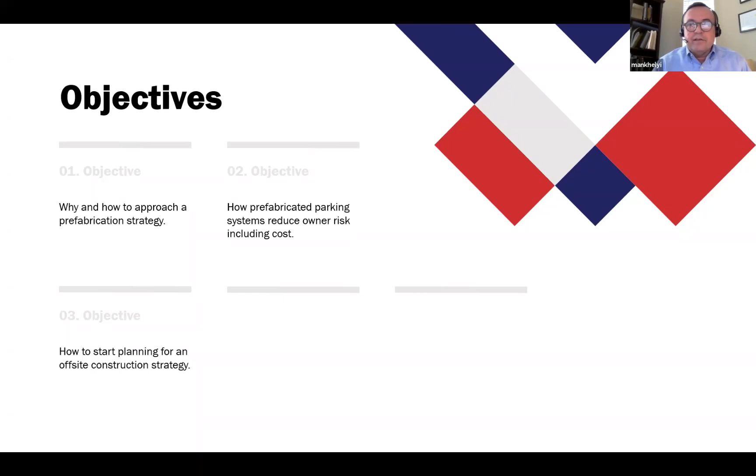Industry benchmarks show that roughly 61% of typical construction projects are behind schedule, while 49% are over budget. With these outcomes, owners are looking for a more efficient, productive, and cost-effective way to build parking structures.

One of the things that I looked at as people walked into the conference virtually - I think we've all experienced it - when the thought of an asset is realized to support an organization's business objectives, the most prevalent next action is to get those folks engaged. And usually there's different ways to get people engaged and who those people are.

We think there's a different way, especially when it comes to parking and office, but specifically to parking: the knowledge on jurisdictions, entitlements, desired parking attributes specific to parking, and operational efficiencies. There is a way to de-risk a lot of the influences on parking, and we want to talk to you all about that today.

And that image on the right you see is actually one of our projects. And no, it's not lunchtime. It's a typical scenario where you see very few folks on site, as most of the workforce is taken off site.

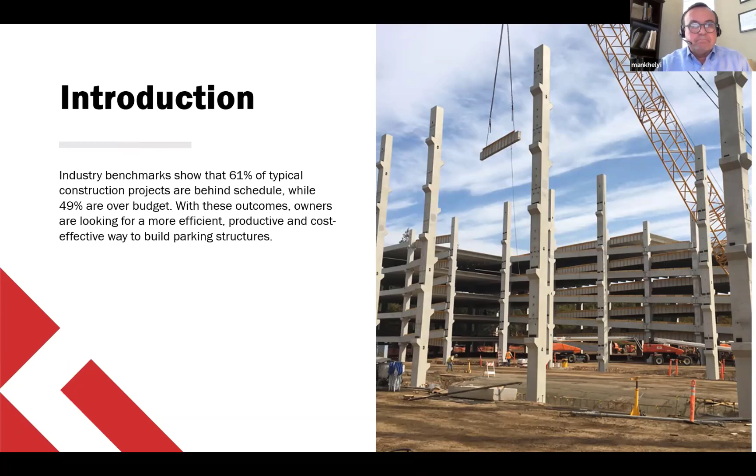So why is that? I think a lot of the industry continues to struggle with the same issues. The same issues dealing with the uncertainty, and the things that are really always driving uncertainty that really influence a bulk of your budget and schedule uncertainty relate to what I call uniques.

And those uniques include entitlements, design errors, unexpected site conditions, conventional design phase approaches, design phase services approaches, workmanship, engineering changes, design and construction. We find that a lot of our owners all of a sudden want to build buildings that are beyond kind of their core group, whether they're in healthcare or biopharmaceutical or they're developers of office campuses.

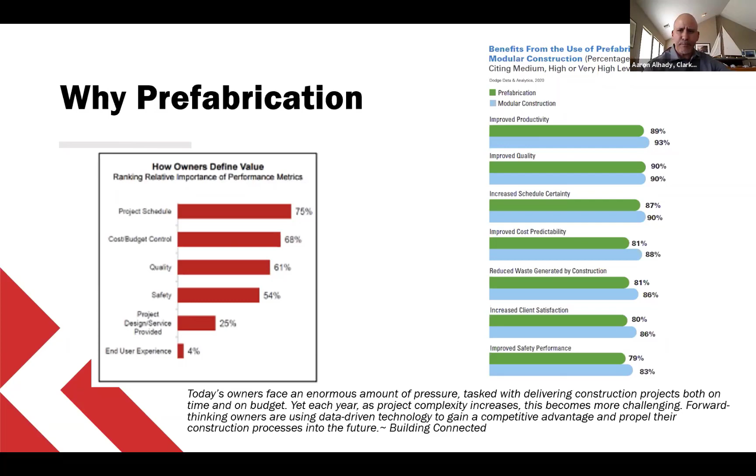Yeah. So traditional construction today is risky, and that's a very common theme. This slide talks about the traditional KPIs we all measure when we go after work. These are things that keep owners frosty in terms of when they bring on capital programs and construction projects onto their sites. Philosophically versus traditional, studying prefab and its effects on design and build means and methods is pretty profound, and across the board the results can be far-reaching in many industries, in those KPIs.

Chi Chi Rodriguez once said golf, and I'll use that interchangeably with prefab, is a thinking man's game. You can have all the shots in the bag, but unless you use them right, you're going to get into trouble. And I always think about my experience in lean best practices and being a lean practitioner.

It's a commitment to do things that are beyond your emotional connections to what you're producing. They're beyond what teams or specific personal goals might be. And when you think about lean best practices, you want to always think about the project first. So you start to think about what you can commit to in terms of realizing the true benchmarks for KPIs with respect to labor shortages, risk to revenue, or cost certainty, and then you commit to it and execute and realize it. We found that a lot of that has to happen in the beginning in delivering the best outcomes for your project.

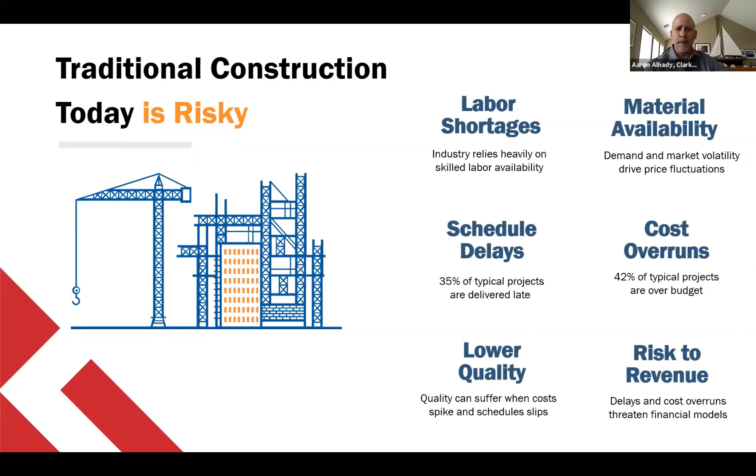It reminds me of a story. Mickey and I were at a job site visit for a prefabricator, a fractional housing development in the Midwest, and actually in the Southeast. The superintendent was showing us around this project, which was wholly basically prefabricated, and he was very pleased about the notion that prefabrication really worked, because when they were out there doing the work and things didn't work out, he was able to call their designers and product people and have them come out to the site and fix the problems right there.

They're only a phone call away, he made it sound like, and it was perfect. So we talked about what made this prefab a success. When you think about what prefab is, which Mickey's going to talk about, this particular project had a sawtooth design on the perimeter footprint. It had 8 different room types and multiple sets of interior wall layouts. So yes, arguably you could move all of those components into a plant and prefabricate them, but that's probably not what really embodies what prefab's all about.

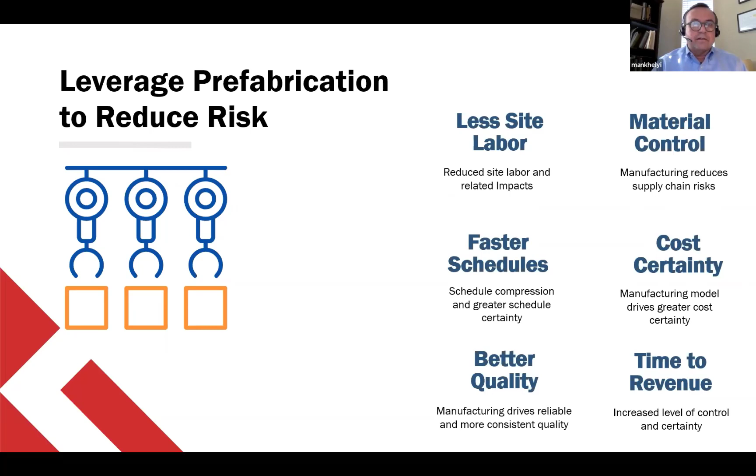Thanks, Aaron. Just one quick analogy that I like to use when we're onboarding at Clark Pacific, in terms of prefabrication, is to look at it kind of like an assembly line for an automaker, as an example. The chassis tends to be the same, and if we can reuse as many of the details and components as possible, the owner can leverage that cost certainty. The outside of those buildings could be very different, but the bones of it are essentially the same, and that really helps leverage the project in a variety of respects.

Quick touch on Coleman Highline, which is one of our examples here. It's a larger campus setting in San Jose, next to the San Jose International Airport. As you can see, the airport is in the background there. Hunter Storm Development is the developer, and the Fisher family is a partner as part of that. The overall campus is roughly 1.5 million square feet of office, with some residential on the tail end of it, and a hotel component.

What's unique is, on the bottom right of the screen, there's the MLS, Major League Soccer stadium, and how that plays into the parking. I'll touch on it in a bit, but a portion of this is built - if you're looking at office buildings, B1, B2, I think B3, B4, and then the same with the parking structures.

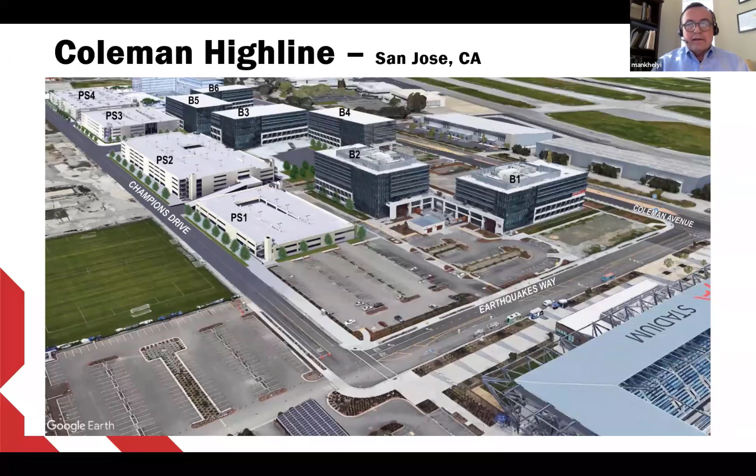Deke Hunter, the CEO of Hunter Properties, part of Hunter Storm - I'll quickly read his quote: Our most recent project that leveraged prefabrication is 5,000 stalls within the Coleman Highline mixed-use development, which sits near Avaya Stadium and the San Jose Airport in California. The site shares parking with the stadium, so we had to deliver the project quickly and with as little disruption as possible so that we could accommodate Major League Soccer games taking place between March and October.

So part of the decision making from their perspective was finding a way to thread the needle, because the parking structures - several of them indeed provide parking for both office and soccer games. And we not only had to deal with how do you segregate either attendees or office workers, but how do we thread the needle in terms of timing, schedule, fabrication, and minimize disruption to temp parking.

If you look at the bottom left below PS1 is the practice field. So there was a lot of moving parts. We had a contractor to the north of us, all those blue and yellow buildings, so that was going on simultaneously as well.

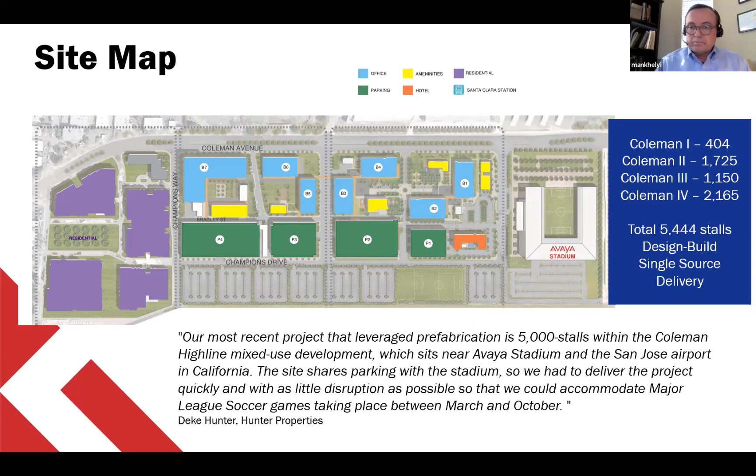One thing I want to mention is we're doing a lot of production planning in the plant. If you look at this, it almost looks like a production plan. You can see the asset types on the north side of the image, and on the bottom you have a different view. This is probably another good reason why Deke was very open to figuring out how we would utilize prefab. He probably just thinks that way.

And to his credit, he has done both, and both in Aaron and I's background we have done both, meaning we've done cast in place parking structures, we've done the traditional design bid build, design build delivery. So with 35 years experience, we've been around the block.

Deke's other quote: We needed the project completed quickly and with a light touch on site. Prefabrication met all our prerequisites, whereas cast in place would have taken longer, cost more, and required a greater footprint on the site and been very disruptive to Major League Soccer games.

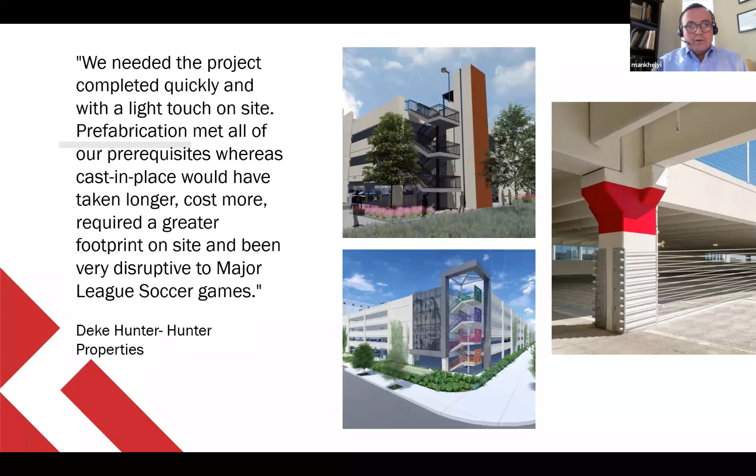A couple images on the right were some quick sketches done. One of the last parking structures actually straddles two cities, so two thirds sat in one city, San Jose, and the other city was Santa Clara. So we had to design it in a way that it appeased both, and we had to have some slightly different elements on either one, which made it a little bit interesting.

To touch a little bit on the architecture side of it, one of the differentiators from our perspective is our buildings come out to the site and they're finished. So the exterior is essentially whatever you want it to be.

And then to minimize the overall aesthetic appeal, you got to remember the office buildings were the jewel of the campus. The parking was supposed to take a subservient role. We simply sprinkled some minor architectural elements.

Like the Cor-Ten elements you see in the upper right image, here and there, because those were key elements that we picked up from the office building. So the goal was to make the parking structures kind of play second fiddle, so to speak, to the office buildings and to the tenants, but still have a very clean and simplistic architecture to them, and then pick up some of the design cues from the office buildings.

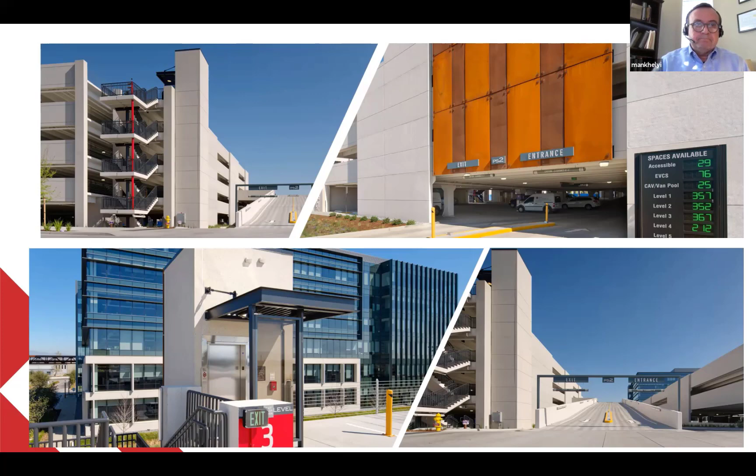Keeping an eye on the clock. Quick run through on the structures.

PS1 and PS2, those were the two on the far right on the previous site plan. Those have been completed, you can see the rough stall count. The bigger one, PS2, has both an internal park on ramp and an exterior speed ramp to allow the ability to separate office workers and soccer attendees on an as-needed basis, and to be able to either exit or enter the building a little bit quicker. So it was a performance criteria and programming.

And then PS4 is in construction and should be wrapping up here in August of this year, and PS3 is in permitting. But similar with that one, the larger one, PS4, has the ability to kind of segregate from a programming perspective to allow for both attendees and for the office workers.

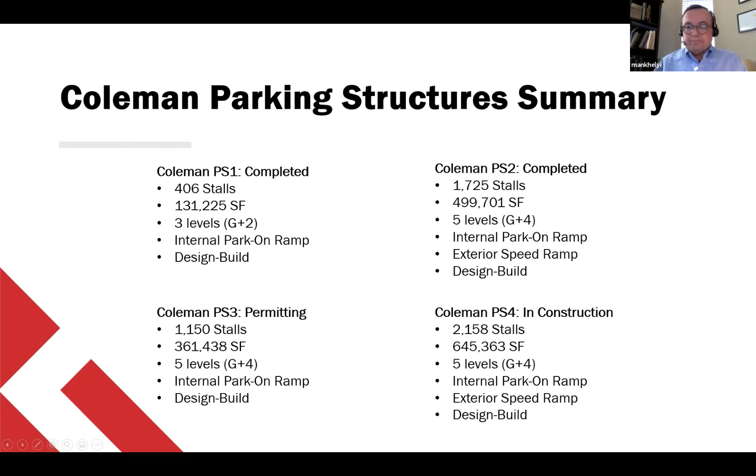One of the things we did when we broke down, Clark Pacific's been around for 57 years, and I'm probably guessing on this one, probably about 7 years ago or so, we started breaking down the overall company into business verticals. And one of the business verticals that Aaron heads up is the parking and structures one.

And as part of that, we productized our approach to prefabrication. So our parking structure, we consider it a product. And we branded it as Clark PARC, Clark being the owners, and PARC the acronym for Parking Adaptable, Resilient, and Certainty.

And most of that, for the most part, should be pretty relative. But as a product, the owner, and marketing this primarily to owners, although we do work with general contractors, it made it simply easy for them. We were the easy button. It was one-stop shopping. They called us, and we can lay it out. We are the parking consultant. We can be the AOR. We can design it. We are the engineers. We are the general contractor, then the manufacturer, and we also erect the building and build the whole thing and turn the keys over to them at the end of the day.

So that really simplified how we thought of it, and it was exceptionally well received in the market we're in. We're based in the Sacramento market, and it has done exceptionally well in Northern California for us at this point. It was launched a couple of years ago, I want to say 2018 or so, and we've been exceptionally busy since then. The image on the right is an example of a higher ed campus setting that was finished, I think, in 2019.

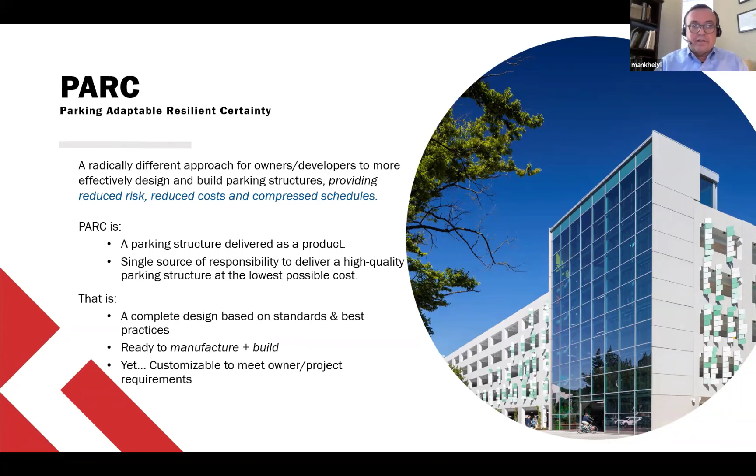Precast, hybrid moment frame, and I'll get into that in a moment, and then the vertical circulation element, and there are a couple of those that house the elevators and the stair core. This was designed by an outside firm, and we do both. We leverage our in-house architecture as well as our relationships with outside firms.

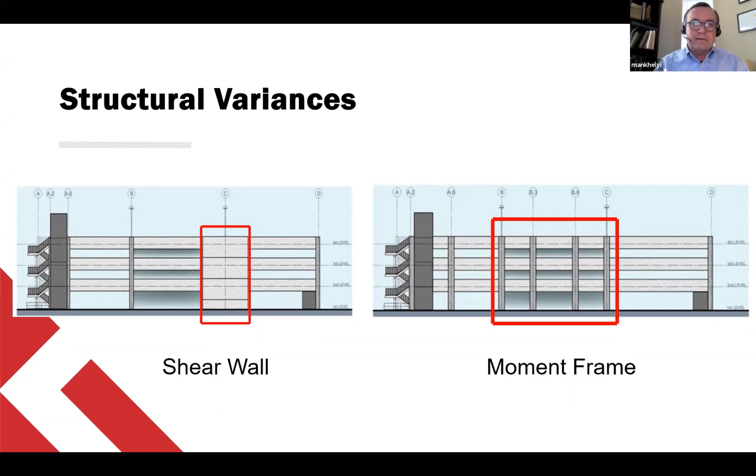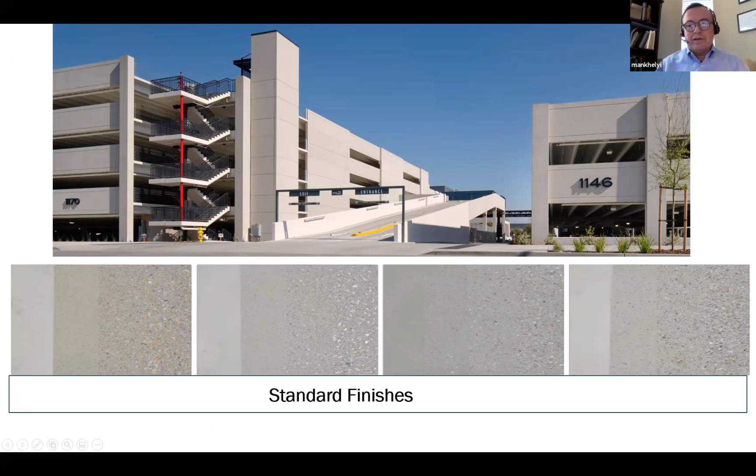So being respective of the couple minutes: lateral design, moment frame, shear wall, depending on the type of building. The one on the right gives you more architectural flexibility because there's more ventilation and a few more things you can do. Standard finishes, obviously the grays and the light tans a little bit to the left. If you look at each of those images separately, say the very left of each, that is the form finish, and as you go to the right, you have different degrees of sandblasting. Now, with that said, concrete can be anything you want it to be, or it could be a different material such as brick. We do that as well.

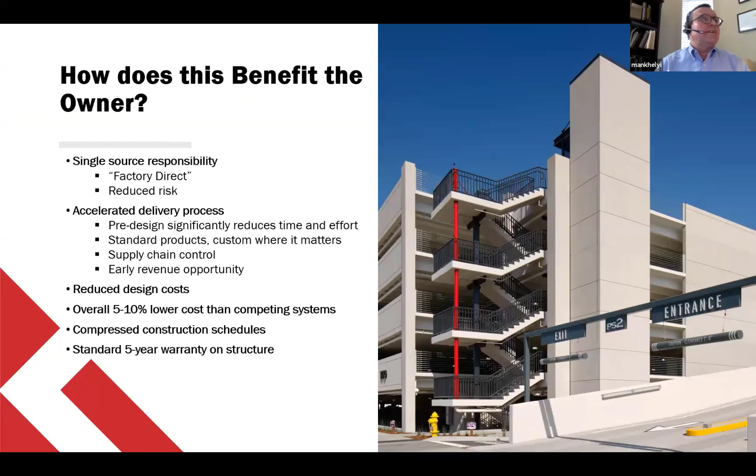How to get started with Park: 6 questions, obviously very architecturally oriented - size, shape, and location of the site, number of stalls. Having all of those answers. The geotech information is crucial. It really drives cost. We get the question a lot.

So do most manufacturers, general contractors - how much is a parking structure? Well, a lot of that actually depends on the soil you're building it on. If it's not so much good soil, that foundation cost drastically goes up, and you wouldn't know it if you're simply quoting from a non-foundational perspective. The level of architectural finishes - we have parking garages that are very simple, like the one in front of you, like Coleman. We have some where you can't see the building because they're completely covered with a kinetic wall that moves in the wind. It depends on what the programming specs are for the structure and what the owner may or may not want.

I'll go ahead and hit this one. One takeaway I would say is that if we get 5 calls looking at a parking asset, usually all of them involve clients explaining issues with their current design or current entitlements, or trying to solve a problem. We take a different approach. The first call could be, in addition to traditional questions, what would your approach be for a prefabrication solution for my business needs on a specific parking asset?